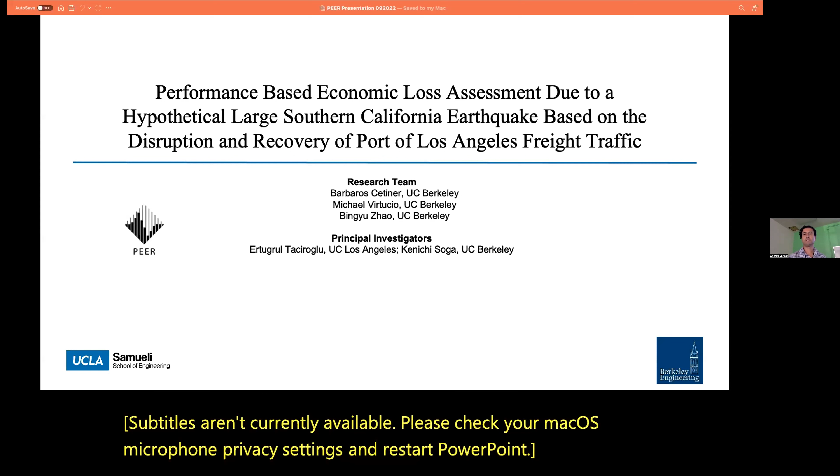Long title, basically, our project was coming up with a loss assessment study for the Port of LA, Los Angeles region. And in reaching that objective, we had to come up with a workflow. So I'm going to be touching on some of the details of the workflow, and then showing some of the results we've been able to get so far.

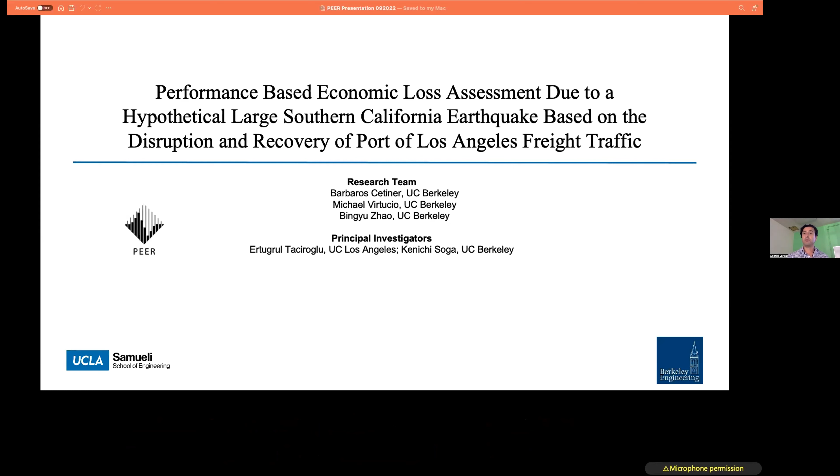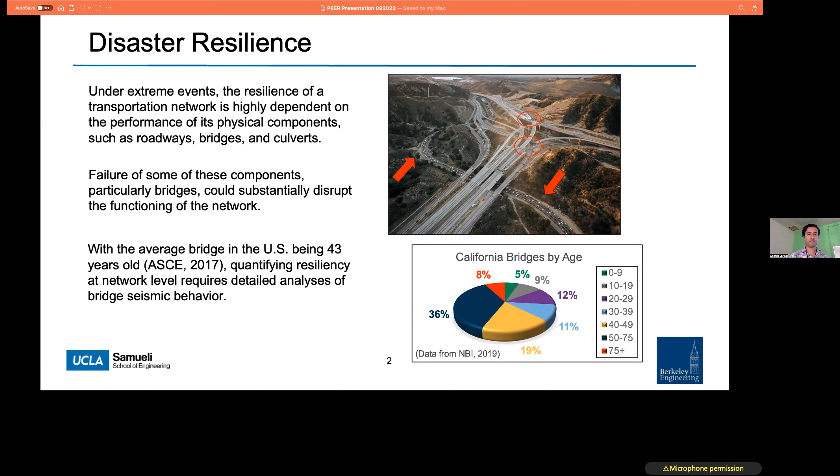I'll skip this bit on resilience and why it's important to focus on network level studies for transportation networks, and jump to the objective. So as I mentioned, one of the goals of the study was to come up with a workflow that gets us from a hypothetical earthquake to loss results in terms of economic or network level consequences.

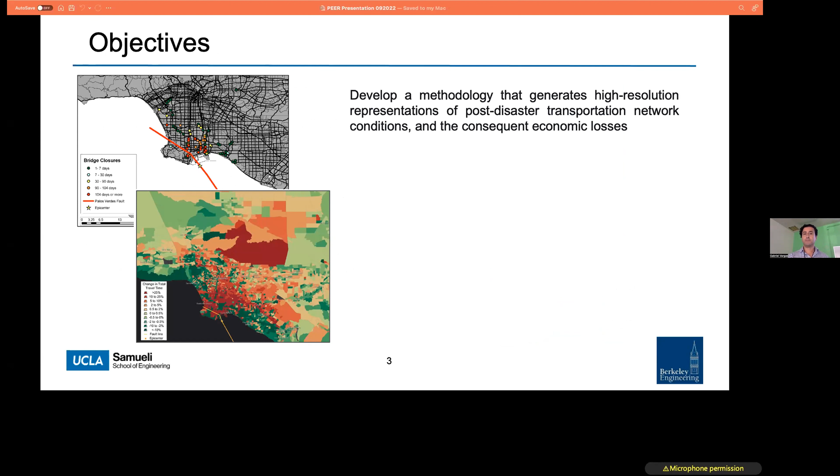And the focus was the Port of Los Angeles and the transportation network around it, mainly because it's the biggest port in the United States, and it makes up most of the container traffic coming in and out of the US.

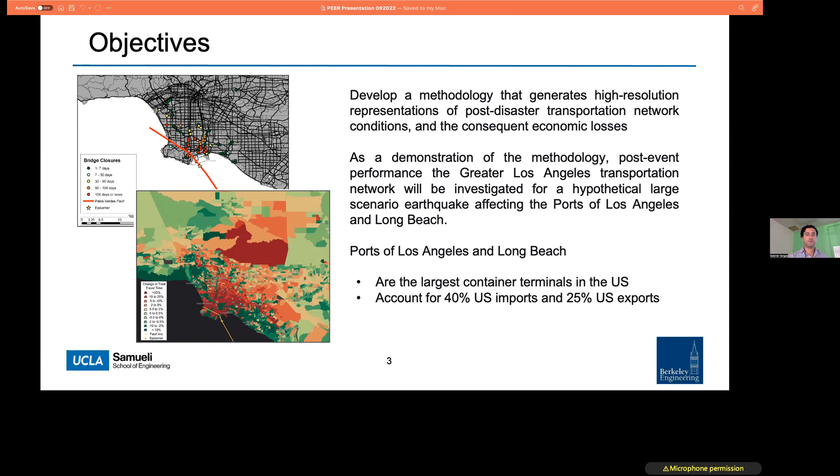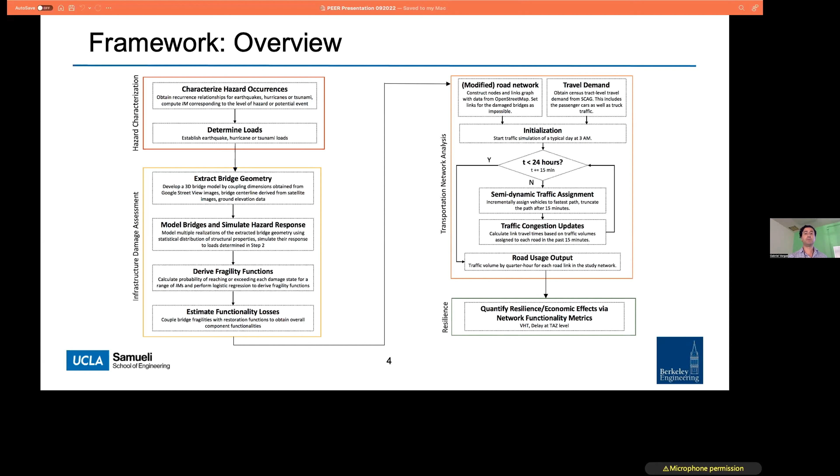Not going to spend a lot of time on the framework. As in the previous presentation by Dr. Baker, the idea is pretty much the same. I'm going to mainly focus on some of the unique ingredients of this framework, and one of them would be getting bridge-specific models using an image-based methodology, and coupling it with a transportation network model that can get some preliminary or rough loss results in terms of economic effects.

So I'll skip this part. I think everyone in this room is pretty familiar with this portion. The part that I wanted to touch on is for this case study, we selected a magnitude 7.3 earthquake that's about 2 miles off the coast of the Port of Los Angeles, and our damage realizations were calculated based on the spectral accelerations induced by this earthquake.

One of the unique ingredients of the study was instead of using archetype fragility curves, we went ahead and modeled pretty much all the bridges around the Port of Los Angeles, basically bridge-specific fragility curves for all of the bridges around the port, using an image-based methodology.

What it is could be a fairly lengthy discussion in itself, but in short, using a collection of street-level imagery of bridges, we were able to connect the center line geometry of the bridges with...

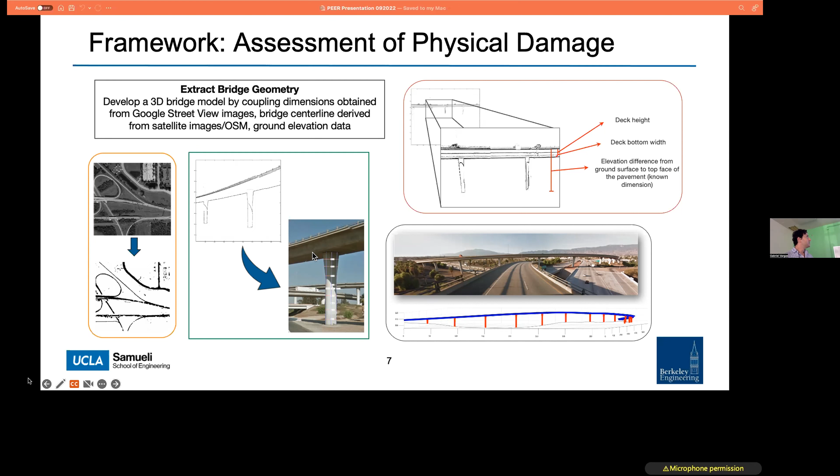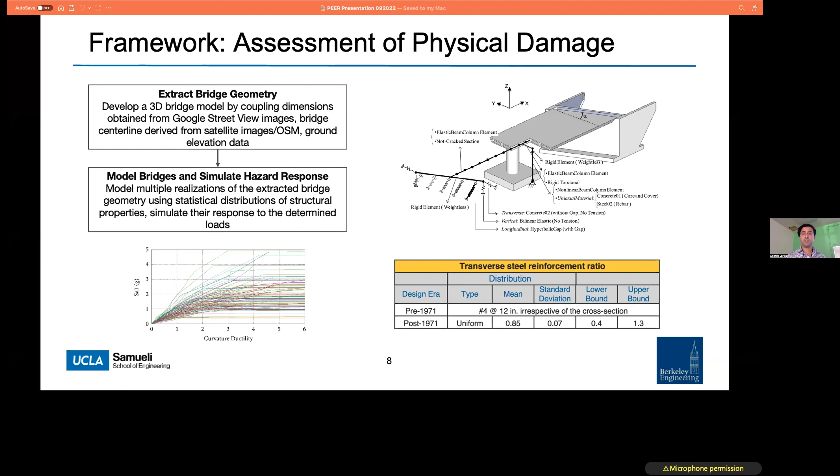There's a transverse steel reinforcement ratio specified based on the year of construction of a bridge, and this information would be pretty difficult to get from images, but the National Bridge Inventory, a generalized catalog of bridges, provides this information. So by combining that information with the bridge geometry, we were able to populate, for instance, the transverse steel reinforcement.

And there's more to it too. That was just one example. There's a lot of these tables for longitudinal reinforcement, some of the other abutment details, and so forth. Once the class statistics are coupled with the image-based geometric model of the bridge, you're able to derive bridge-specific fragility curves.

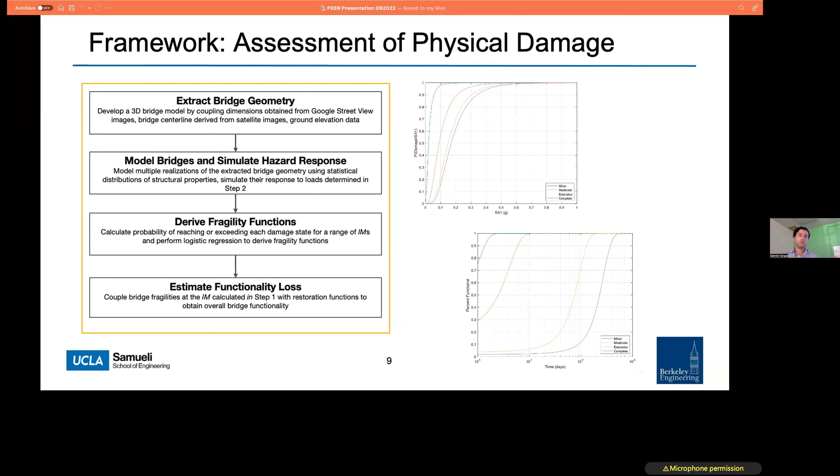But to predict the downtime, what we used was some of the restoration functions provided in ATC. Some of them are outdated, but they provide a means to couple the damage probabilities with expected downtime.

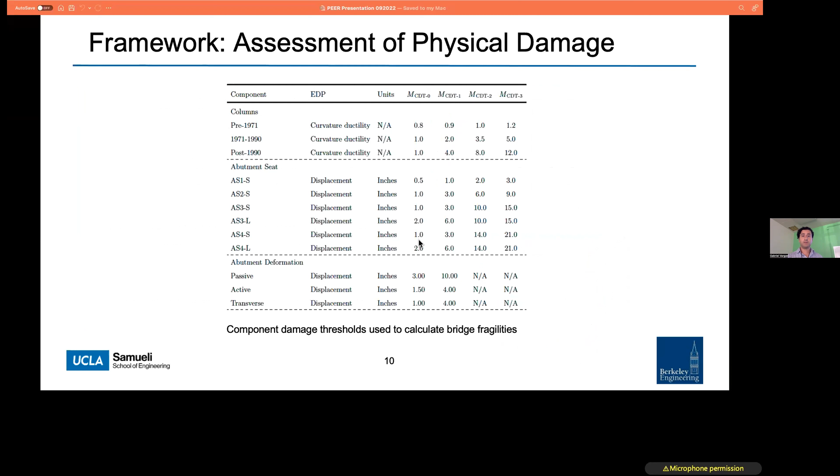And the way we define damage, we use the methodology introduced by Pierre, and some of the damage thresholds again came from literature. The main thing is we lump the damage into two main components: damage to columns and abutments. The rest, such as in-span hinges, we didn't really focus on, but we're not able to capture those with this image-based methodology.

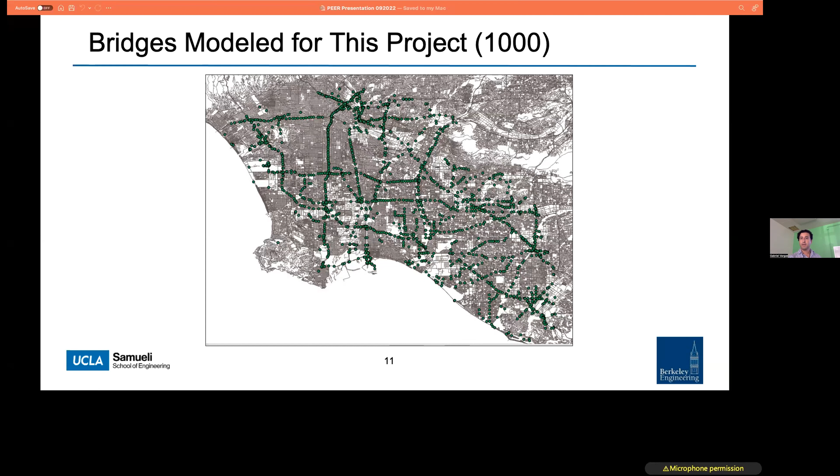Hi, everyone. So I work with Kenichi Soga, and this is the transportation traffic part of things. So compared to, I guess, Dr. Baker's work earlier, we went the painful way and went through it with the simulations. But yeah, I'll go through a basic overview of how we did it.

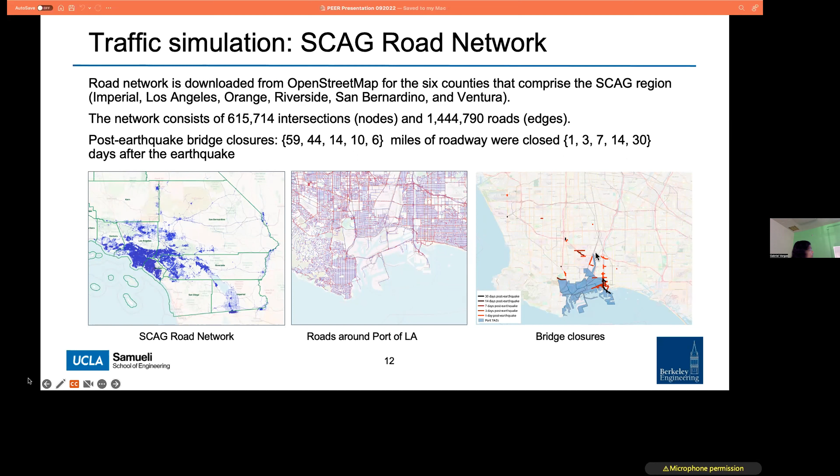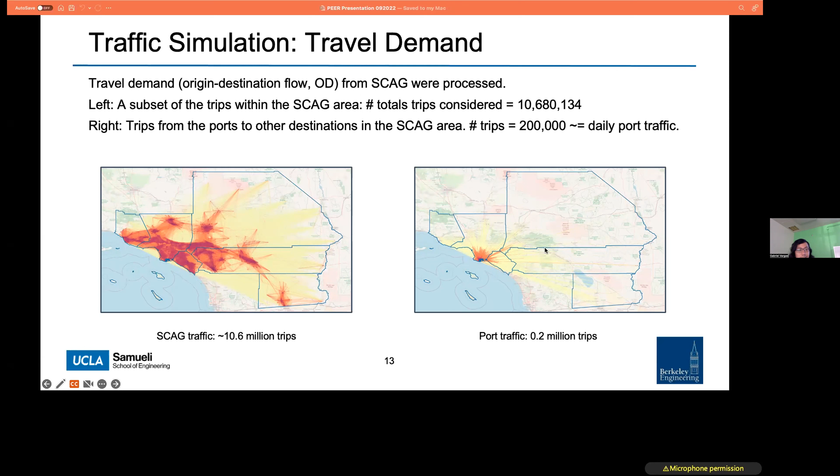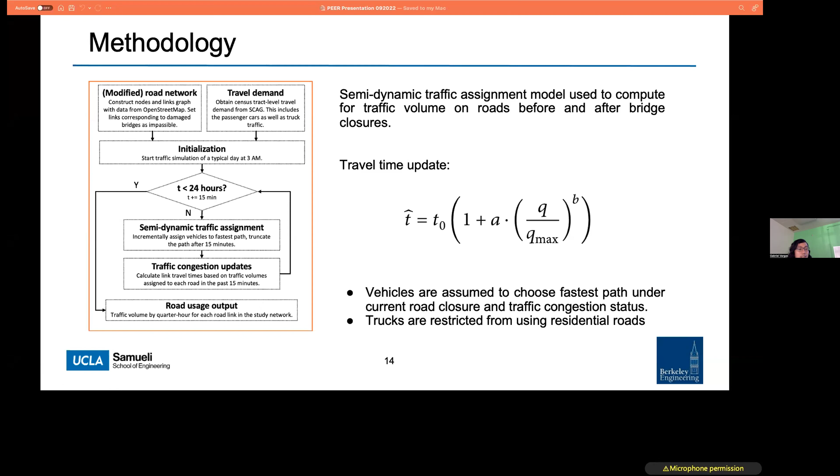Yeah, so we ran this 10 times to make sure that the randomness from each run doesn't really influence what we're noticing in terms of the results that we get, and that was the case at least.

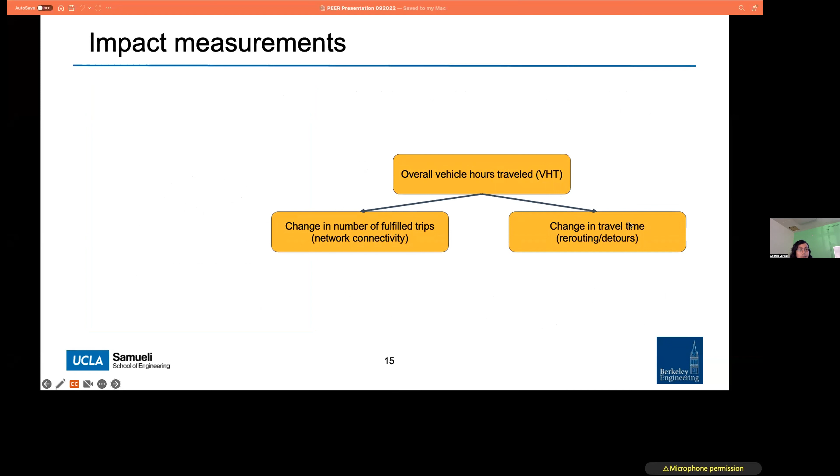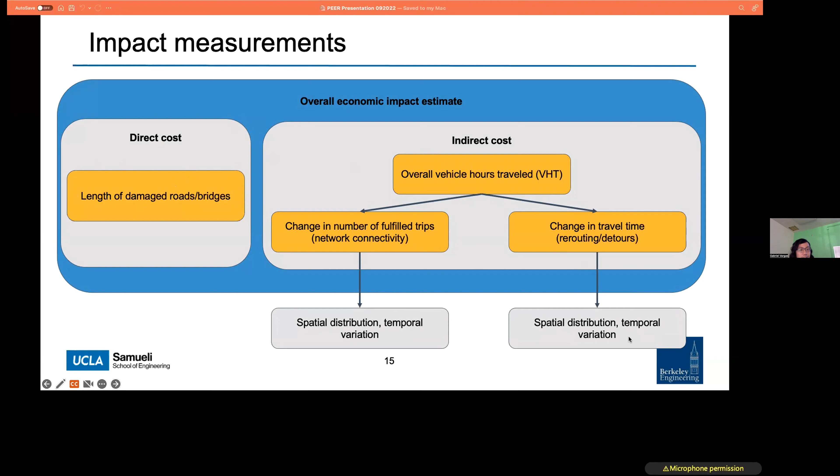And then to measure the impact, there are basically 3 components, at least on the traffic side that we looked into, which is vehicle hours traveled, which could be broken down into 2 more components: the change in the number of fulfilled trips, which signifies the network connectivity, and the change in travel time, which signifies the need to reroute or detour. And this, combined with the length of the damaged roads and bridges, would constitute our impact estimate, split into the direct and the indirect cost. And furthermore, because of the model that we use, we're also able to get spatial and temporal variations of the impact.

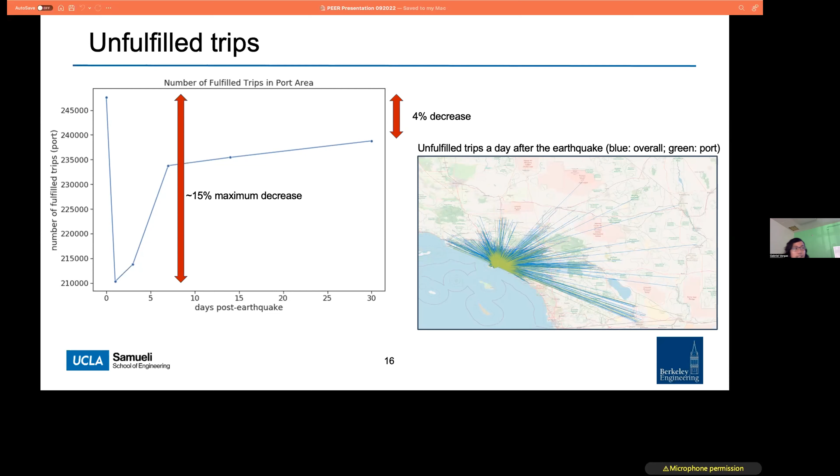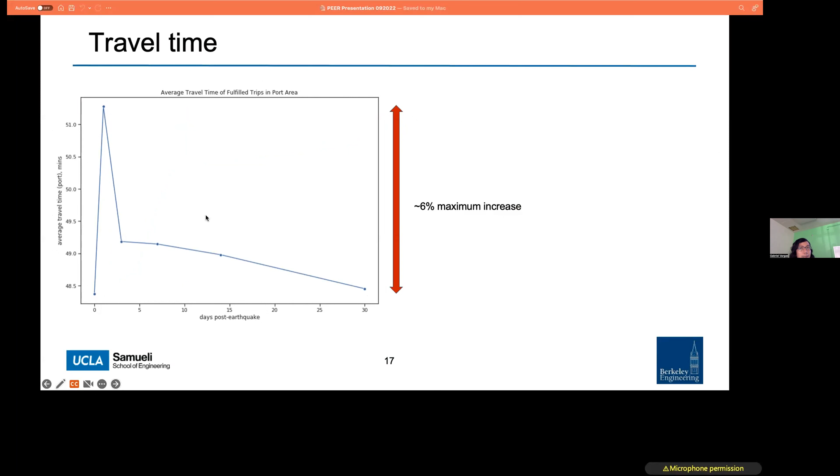And then for the average travel time, it increases a maximum of 6%. But later I'll show you that compared to the impact of the unfulfilled trips, this is a bit dwarfed. And then for the overall vehicle hours traveled, we see this initial drop the day after, but then a little bit more of a drop 3 days after, and then it rebounds back.

This was a bit strange initially to us, but how to explain this quickly is that 3 days after the earthquake, roads inside the port area were estimated to have recovered, and so their travel times decreased in that sense and contributed to the decrease in VHT.

And then only after that did more fulfilled trips complete, because of an opening of a bridge that connects a port to the other parts of LA, which leads to that rise again.

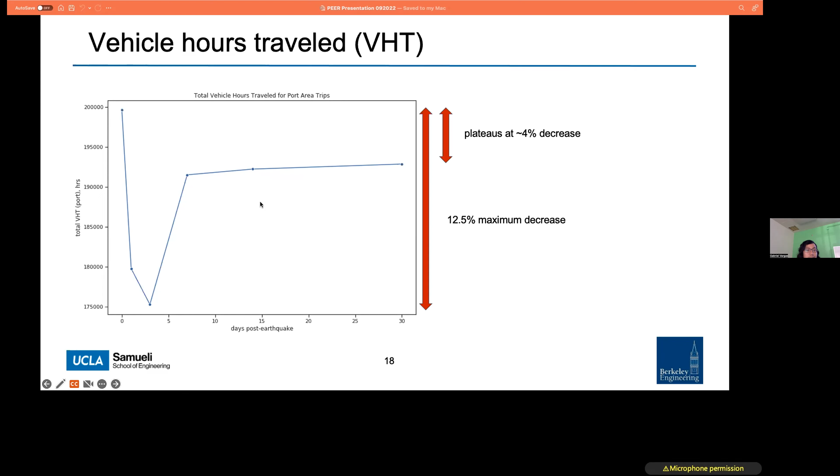And in terms of the impact assessment, one thing that we found was that around 2/3 of the cost is direct, and then the rest is indirect. But with the indirect costs, most of it is because of the demand that's lost, and very, very little is caused by congestion or delays.

Initially, we were comparing it with SCAG GDP, and it seems that it's less than 1% of the SCAG GDP. So it seems like the impact isn't that much. But while making this presentation, I think one thing to look at is the budget of retrofit and how this compares to that.

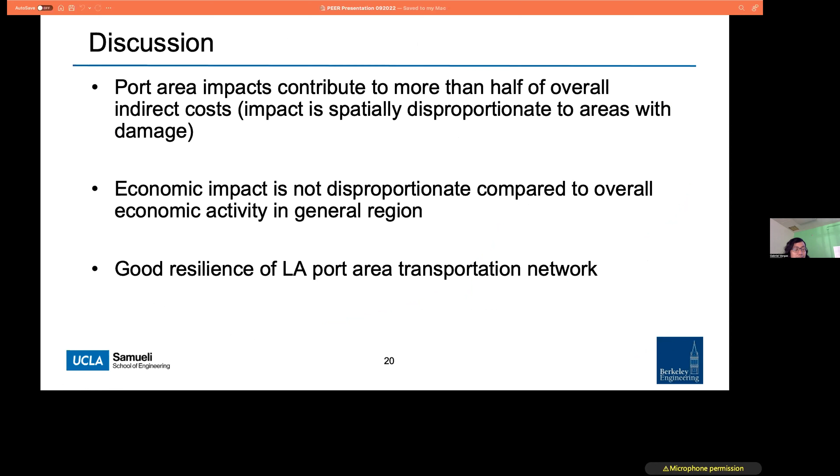Some of the discussion points that we extracted so far was that the port area impacts contribute to more than half the overall indirect cost. So at least spatially, there is a disproportionate impact there. But overall, the impact, at least by the transportation network, is not disproportionate to the overall economic activity in the region. And so we have a sense that maybe there is some good resilience of the port area in LA, at least the transportation network there. And that's all for now, and we're open to questions.

So first of all, great presentation. My question is related to the model generation. I found it really interesting how you were able to use imagery to pull that out. To what extent is that process automated? For example, if you'd like to repeat this analysis for another region, because Google Street images and other images are readily available, how hard would it be to apply it in another place?

I would say it's like 95%. So the question was, we generated bridge models using images. To what extent is that process automated? I would say about maybe 95%. The ones that we run into issues are full steel bridges, because we don't have enough class statistics for those kinds of bridges. Being able to come up with class statistics for all regions in the US is hard. California is well studied, not all regions are the same.

A couple more issues are certain bridges that go over rivers and channels, where the availability of street view images degrades quite a bit. There are methods for that, but I haven't had time to work out the if and else statements necessary. I would say 95%. But the first time I gave this presentation, it was maybe around 75%. So it's getting there. Thank you.